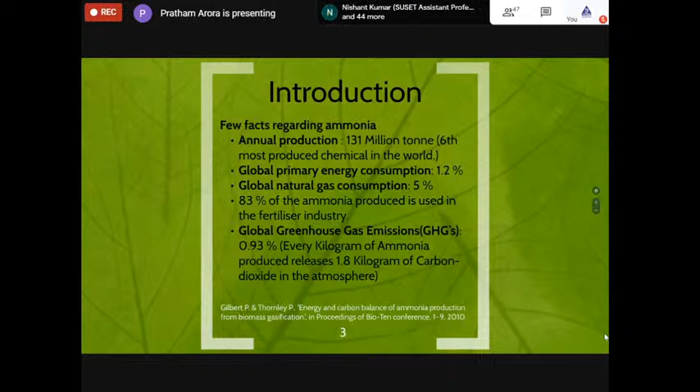So next, can biomass be a potential feedstock for this? Now, biomass is widely available and it is carbon neutral, because any emissions that you cause by the use of biomass or through the burning of biomass are recycled again through the growth of biomass in due course of time.

The same can be said for fossil fuels like coal or natural gas. They would be produced in due course of time, but their due course of time would be of the order of millions of years, whereas for biomass it could be as low as 20 to 30 years. That's why biomass is said to be carbon neutral. It has a very low shelf life in terms of CO2 emissions. The emissions caused now by burning or using biomass will be recycled in another 20 years, so the life cycle of the CO2 is very small, whereas for fossil fuels it would span millions of years.

But biomass, unlike other fossil fuels, has a low energy density. The reason being, biomass has a huge amount of oxygen. A typical biomass would have around 50% oxygen, whereas this quantity is only 5 to 6% in coal. So the efficiency is almost reduced by 50% as compared to other fuels like coal or petroleum, which hardly have any oxygen. This also decreases the density, and a decrease in density means a huge transportation cost.

Also, biomass is not available all the time. It's restricted by seasons. You have certain farm-based feedstocks which are available only after the harvest of crops. Wood can only be harvested at a particular time. Like, when the monsoon season is going on or just ended, you can't harvest any wood at this time because it would have a huge amount of moisture. So it has its own problems.

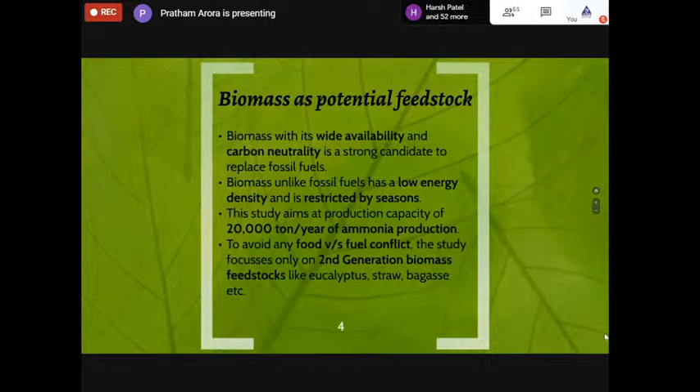So we are just aiming for second generation biomass feedstock, which includes trees like eucalyptus or rice straw, which has been burning in the field, or bagasse, which don't have any food value. So they are called second generation biomass feedstocks, and our study will focus on these types of feedstocks.

But there are some added advantages as well. If any of you is from North India, you might have experienced the smog in the months of October and November - I believe it's going to start again soon. This is majorly attributed to the burning of straw in the rice fields. The farmers are also helpless; they have just 15 days to extract the waste from the field and plant a new crop. They don't have enough money to collect the feedstocks spread on the field, so the best way they can do it is just burn it. This makes the task easy and helps their soil, but causes pollution throughout northern India.

The second part is something peculiar that we notice in countries with huge deserts, like Australia. Here you can see salt coming out of the earth - this is called dryland salinity, caused by high water tables. The salt comes out of the land and renders it useless for any purpose. It could be made useful by planting trees like eucalyptus, which consume a lot of water, and by using that water they can help solve this problem. So not only the problem of ammonia production, but we are also trying to solve associated problems like pollution in northern India as well as dryland salinity in Australia.

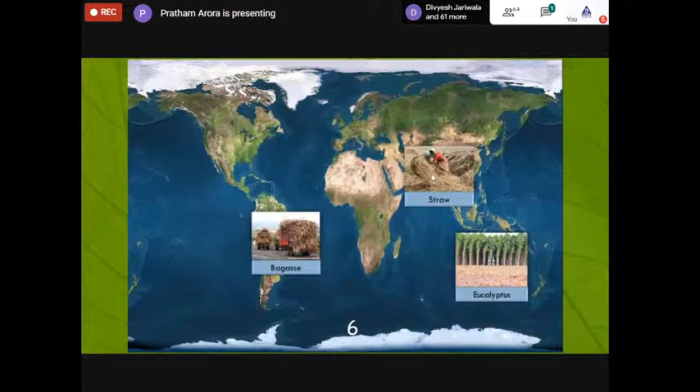So, reiterating again, now I have three different countries and three different biomass feedstocks: eucalyptus, straw, and bagasse. All three are different types—one is woody, the other is a farm waste, and the third is an industrial waste or secondary residue. And third, all three have different supply chains; there's no similarity whatsoever. So the aim was to get enough diversity—we are looking at different countries, different biomasses, and different supply chains, and we are trying to see if we can produce ammonia from different aspects using biomass. So let's go further.

Now, we chose a process called biomass gasification. By biomass gasification, I mean you gasify or heat biomass in an insufficient supply of air. When you do that, biomass gets converted to gas called syngas or producer gas, depending upon the oxidizing agent. If you are providing air, about 50% of the gas is almost nitrogen, and it's called producer gas. If you are giving steam or oxygen, the output gas would be concentrated in carbon monoxide and hydrogen, and it's called syngas.

Different types of gasifiers have been proposed at different levels of operation, and some of them are listed in this figure. If you're coming from a mechanical background, you might be aware of this, or if you've done research on biomass, these are different types of gasifiers available, and all of them are economical in different ranges of capacity. Beginning with downdraft to updraft—downdraft is economical at very low scales, maybe 1 to 10 tons per day of biomass, while entrained flow gasifiers are economical at very high scale, around 10,000 tons per day. The scale we were aiming at, based on the ammonia production scale, was around 100 tons per day, and the gasifier that was most economical was the fluidized bed gasifier.

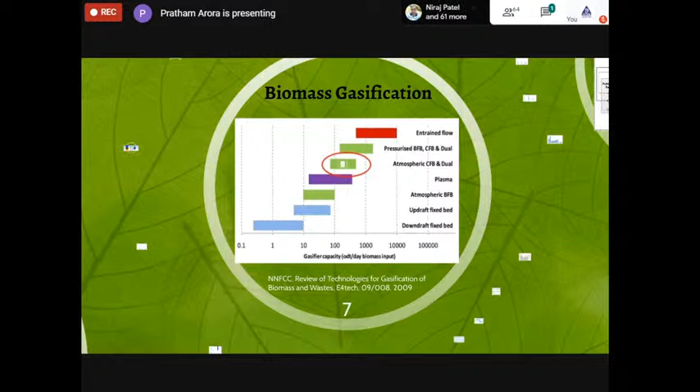By fluidized bed gasifiers, I mean biomass is sieved or cut into small parts, and it's entered into a bed which is subjected to a very high velocity of gases, such that the whole bed appears like a fluid. Let me show you in the next figure.

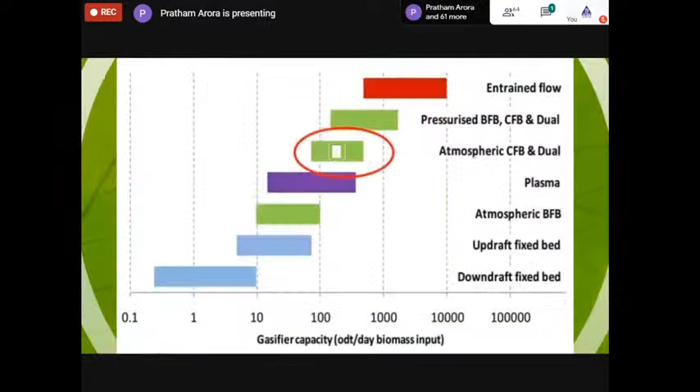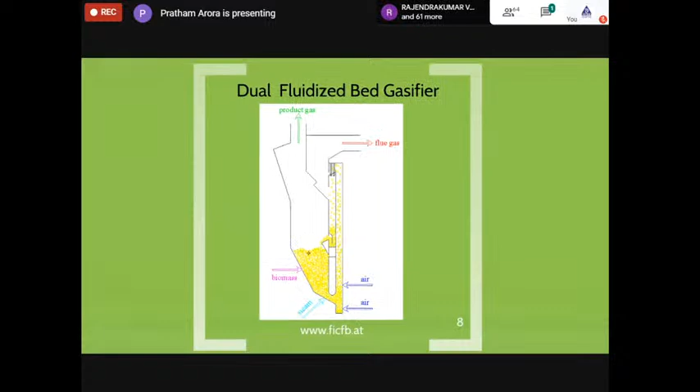So this is how the concept works. You have the biomass going in from the left side of the reactor, which is the biomass gasifier, and you have the steam, which is acting as an oxidizing agent. The steam is supplied at such a rate that the whole biomass acts as a fluid. That's why the name fluidized bed is suggested.

What happens after that? As soon as the biomass and the steam react, the biomass gets converted into three things. One is the product gas, or the syngas, which goes out of the reactor from the top. The second one is the char, something similar to charcoal, very rich in carbon, and that slides down and enters into a second reactor, which is called the riser. In the riser, we have a supply of air.

With this air, the carbon burns. Burning of the carbon will heat the bed material. The bed material used here is silica or something similar to sand. That sand gets heated and it goes up. There's a cyclone up here which removes the flue gases, which is just nitrogen as well as carbon dioxide, and the heated silica or bed material recycles back.

So the heat for running or burning of the biomass is coming from two sources. One is the steam, and the other is burning of the char that is produced, and that char in turn heats up the bed material, which is the sand. The hot sand gets recycled, provides heat for the biomass gasification, and we have the syngas going from the top. The whole process doesn't have any oxygen entering into the product gas, so that's why the gas we get is very rich in hydrogen as well as carbon monoxide. This is what the gasification process that we will be modeling looks like.

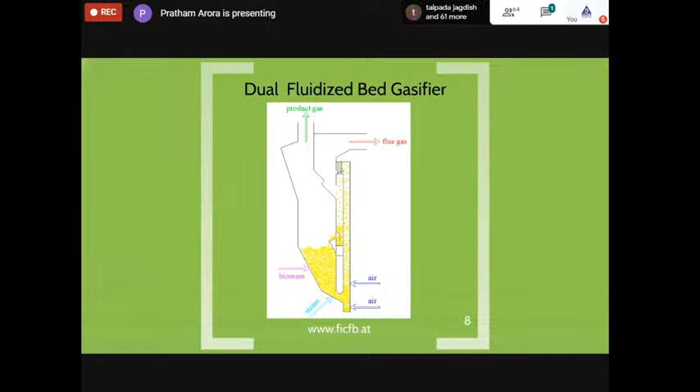It's called a dual fluidized bed gasifier because the fluidization is occurring at two beds, one for the biomass and the other for the char. So there are two fluidized beds combined together. It's very similar to the FCC cracker that you would see in a conventional petroleum refinery, if anyone has done any research on crude refining.

Okay, so let's start with the modeling of the gasifier. A multi-scale approach was used. The gasifier that we chose was an 8 megawatt gasifier that has been running successfully in Austria for the last 15 years or so. It is one of the success stories in gasification, which doesn't have many success stories till date. We adopted all the input data from that particular gasifier, which is available in open literature.

The first thing we did was recognize that gasification is a dynamic process. It has a lot of variability with respect to the supply of biomass and oxygen, and the simulation we were aiming for was a sort of steady state simulation. So we had to convert a dynamic system into a steady state system. How do we do that? We did something called the RTD approach, which is residence time distribution, or the tracer approach.

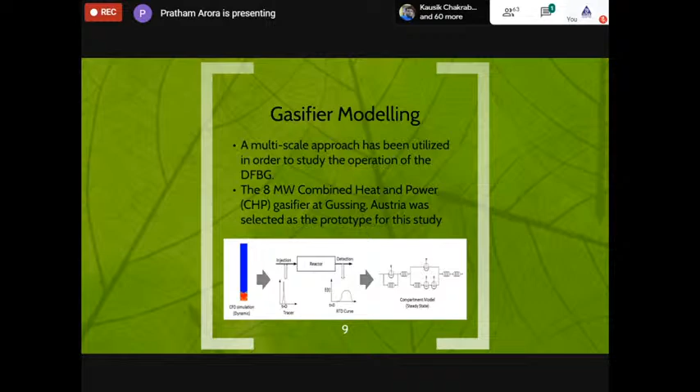We simulated the whole fluidized bed process in ANSYS Fluent software. Once the simulation achieved a quasi steady state, we introduced a tracer at the input and noted down its concentration at the output. The structure of the tracer's concentration profile at the output hinted at the possible network of ideal reactors that could be used to replicate this dynamic system. Let me take you to more details.

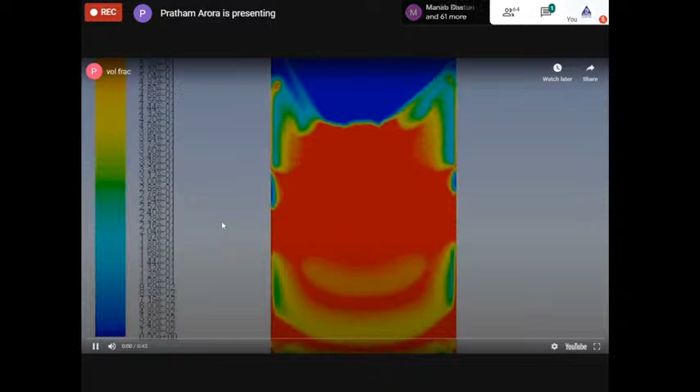So this is what the typical fluidized bed looks like in a simulation. Probably you can see now the bubbles are almost equidistant on the left and right side, but as time proceeds, the profile changes.

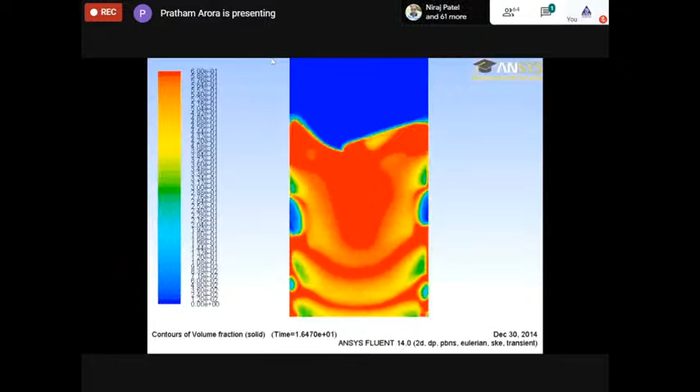So we can note down certain essential parameters and see when they stabilize, and at that point we can say it's a quasi-steady state. Once we have achieved that, we can introduce a tracer which doesn't have any reaction, which won't react with any of the components. It will just go with the velocity flows, something like this.

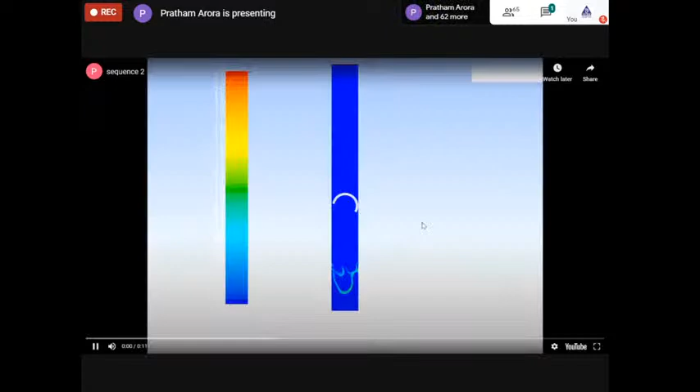You introduce a tracer and it goes along with the velocity profile of the current profiles, and you can note down the concentration at the end. You can see some of the tracer in the middle there.

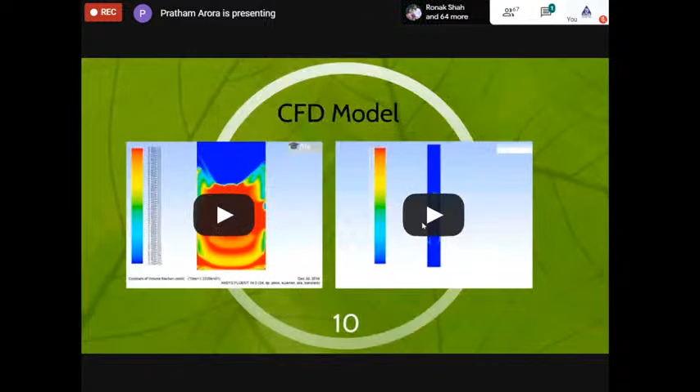So this is how we did this in ANSYS Fluent software, and we took different approaches. Let me briefly mention them. The first one is that we froze all the velocity profiles and let the tracer go through, and we got a very simple tracer profile at the output.

The third one was a data sampling approach, in which I averaged the velocity profiles over say 10 seconds and then did a tracer analysis, with similar results. Finally, I had to do a transient approach in which the velocity profile or velocity equations are changing in concurrence with the tracer equation. This gave us the tracer profile which we aimed to replicate.

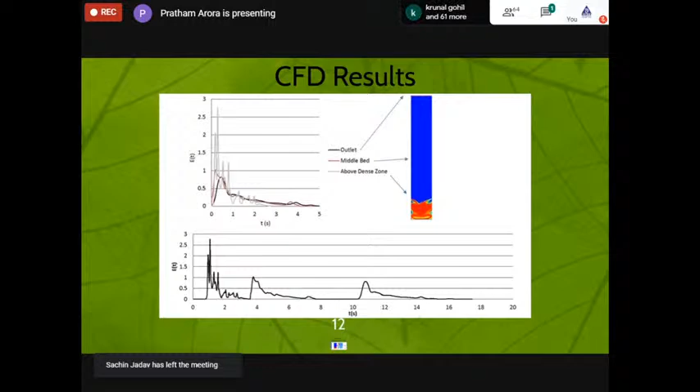This also gave us a deep insight into the velocity profiles. On the right-hand side, I'll show you the velocity profile, how the gases look at different heights. We could see that just above the bed there is a wake formation, so either the gases are going from the left side or the right side. So there are two different chains of reactors that would be needed to model this.

And the model that we came up with was something like this. This part is basically a dense zone or the fluidized bed, which includes — okay, let me give you an understanding of the different ideal reactors as well.

There are two kinds of ideal reactors. One is called a plug flow reactor (PFR), and the other is the continuous stirred tank reactor (CSTR). Any reactor we might have could have performance in between both of them. They are the two kinds of ideal reactors which replicate the ideal flows at the two ends of the conversion process.

So any process, or any reactor, can be modeled as a combination of these ideal reactors — it could be multiple PFRs or multiple CSTRs. Our aim was to model this dynamic process with the help of these ideal reactors, called PFRs or CSTRs. So we came up with this model, the first for the fluidized bed.

Now, the fluidized bed has the bed rotating inside, so it should have a recycle. So we came up with the reactor design: a CSTR with a recycle, followed by a PFR. Now remember the middle, where I showed you the two wake formations.

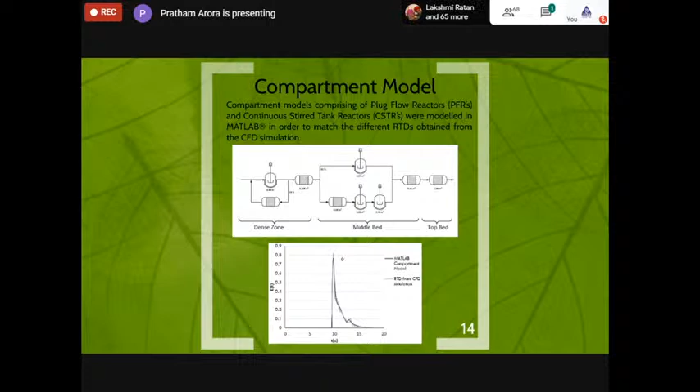We also did a study where we tried to match it with the standard equations using MATLAB, and we got a nice validation of our model as well.

So this is how the reactor looked like: the combined fluidized bed reactor, which I've shown here, has the dense zone as well as the syngas coming out, and the char going to the combustion reactor, the char combusting, and the hot sand coming back. It could be modeled something like this.

This was done in Aspen Plus software, which is a very dynamic software, mostly used for chemical engineering processes, but now gaining a lot of importance in process systems engineering, specifically for biomass related simulations. So this is how we could model the whole biomass gasification process.

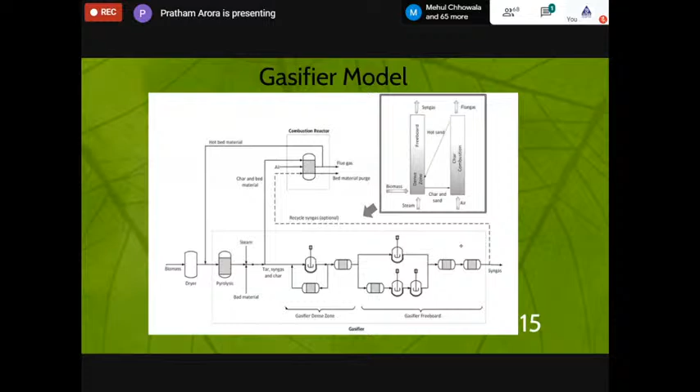It started with biomass coming in, then we have a small pyrolysis reactor which breaks down biomass into different components. Then in the whole gasification process, we have the char and sand leaving; it goes to the combustion chamber, gets heated, and the hot bed material is sent back. So all the processes that occur in an actual process were replicated in the simulation in a steady state. This was our first task, and that was fulfilled.

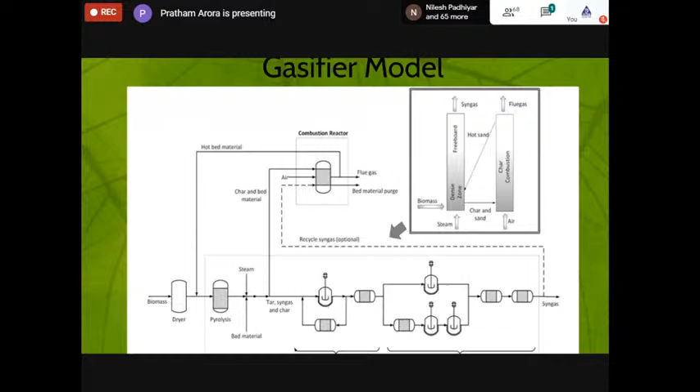And not only this, we did it for 3 feedstocks. Remember, we had 3 feedstocks in the initial one: eucalyptus or wood, straw, and bagasse. We had a common input of 2.3 tons per hour, with moisture content around 27%.

Based upon the characteristics of biomass, we had different composition of gas, though all 3 of them had almost 40% hydrogen and around 20% CO. We could validate this with experimental values, and we came up with nice validation.

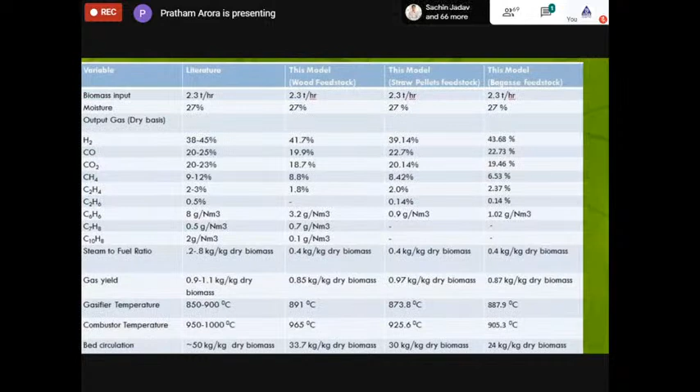So you can see different biomasses react differently. They produce gases of different composition, different types of tars, and different temperature profiles. You can see the temperature profiles varying, and they would also have different amounts of bed circulation rate needed, which also changes to maintain these temperature profiles.

Again, we did a sensitivity analysis, and even that was found in validation with the open literature. We could find the relationship between the gas composition, temperature, and the gas flow rate, and that was nicely validated.

So once the model was ready, we wanted to go for ammonia production. Now, ammonia production is a difficult process. Hydrogen comes from the reforming of synthesis gas. If any of you remember natural gas reforming from school or college, that is the process of producing hydrogen, and that hydrogen is then combined with nitrogen to produce ammonia. So we tried to do the same thing.

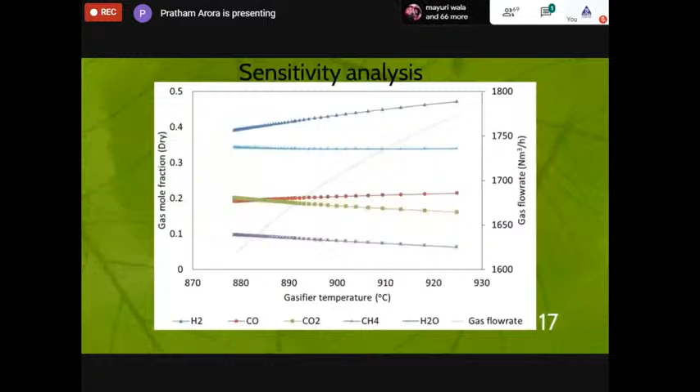Once you have reforming, which occurs at around 800 degrees Celsius, we need to cool the gases. Then we need to compress the gases at around 20 to 30 bars, because all subsequent processes occur at high pressure. Then we have a shift reactor, which is basically conversion of carbon monoxide into carbon dioxide.

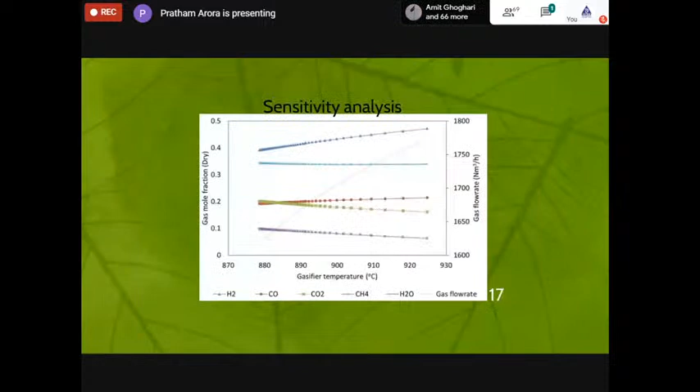The gas has almost 20% carbon monoxide. If you look up the water gas shift reaction, it's nothing but CO combining with water, giving CO2 plus hydrogen. So in a way, I'm converting carbon monoxide into hydrogen while consuming some water. That's where the steam is going in.

After the isothermal shift, we need a saturator or desaturator for removal of water. Then we need a PSA for removal of CO2, and also a methanation unit to remove any leftover carbon monoxide or carbon dioxide, because these poison the catalyst. Finally, we have another compression which compresses the gases to around 80 bars, and we have an ammonia synthesis loop running at this lower pressure.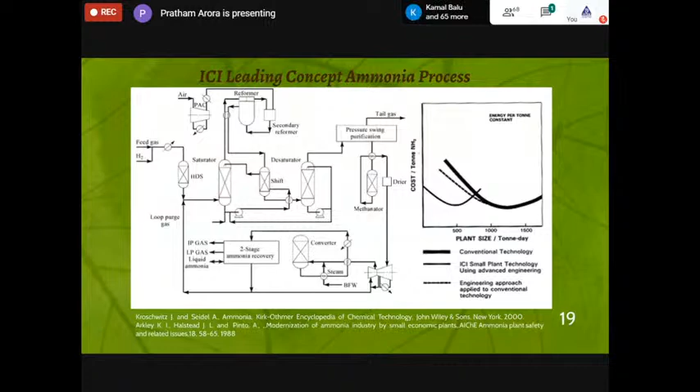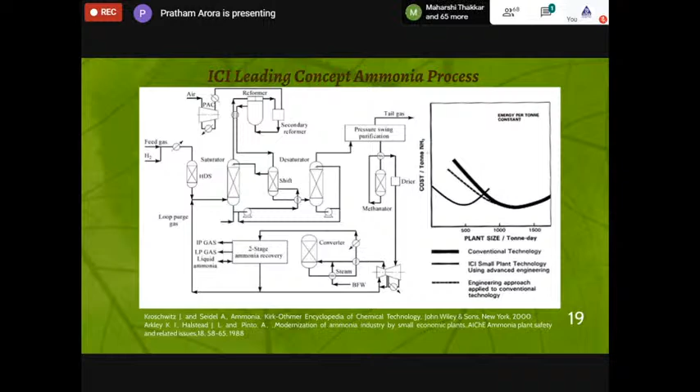The reason we did this is that the plant we adopted was a technology from the early 2000s for small-scale ammonia, but it couldn't compete with large-scale plants due to certain factors. Whereas normal plants achieve minimum cost at around 1500 or 1200 tons per day, these kinds of plants achieve minimum economics at around 450 tons per day. That's why we adopted these technologies—it was a novel combination of a new technology, the dual fluidized gasifier, with an old technology, the ammonia production process.

So now we have three different configurations of the ammonia production process as well, based upon how we are reforming the syngas.

The first one had an autothermal reformer, which means I provide in the air. The air has nitrogen and oxygen. The oxygen is used to combust some amount of syngas, which would provide the heat, and the nitrogen provides for the nitrogen requirement for ammonia. Remember, ammonia is two things, hydrogen and nitrogen, NH3.

The nitrogen is coming from here, and the hydrogen is coming from the gasification process as well as the shift reactor here. The second option is steam methane reforming, wherein I'm just providing in steam. I can do it with a small reactor because everything up to here doesn't have any nitrogen. The nitrogen I can provide just before the ammonia loop through an air separation unit. But I need to provide the heat for the reaction, which would be taken from burning the fuel outside the reactor.

The third one is a novel combination, called CO2 reforming or dry reforming. Why not use the flue gas from the combustion section of the gasifier? The gasifier had two fluidized beds, one producing syngas and the other burning char and heating up the bed material, and the gases released were just nitrogen and CO2. So why don't you use that gas?

That gas is coming at around 800, 900 degrees Celsius. You use that gas in this reactor. That will provide heat for this reaction, as well as provide the nitrogen that is needed later on. So this was a novel combination that we proposed.

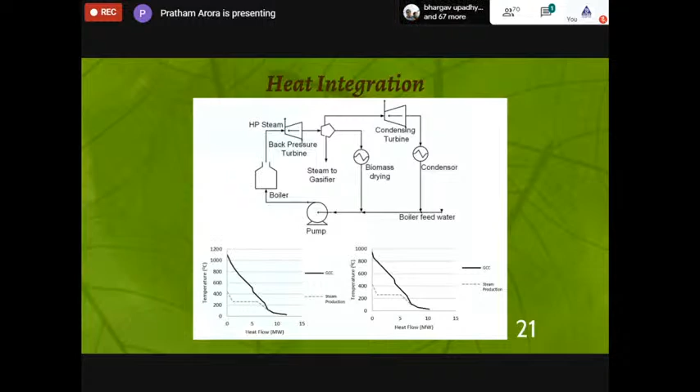Biomass feedstock is the cheapest in Brazil, since bagasse or sugar cane is grown a lot. Then second comes India, and Australia has the highest cost of production of biomass. Electricity is highest in Australia, second comes Brazil, and the lowest is in India.

So different factors would apply differently when we are talking about the same process. We have the same process of ammonia production, only the difference is different places and different biomasses. And you can see how different the economics could be. For India, I could produce ammonia for as low as around $700 per ton. It goes almost double, around 1,300 per ton, in Australia. A similar process, but a different biomass.

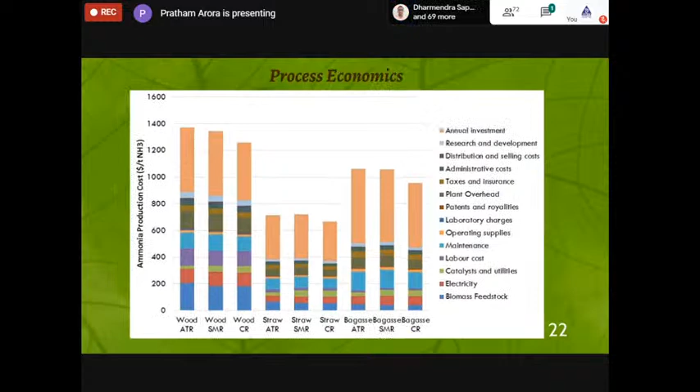It's highest for the SMR case. The reason being, we need an extra reactor, an air separation unit to supply nitrogen, whereas nitrogen could be supplied through the reformer in both the ATR and the CR. In ATR, it's the air which has nitrogen. In the CR, it's the flue gas which again has nitrogen. But for the SMR flow sheet, we need an extra source of nitrogen coming through the ASU, and that has its own cost penalty.

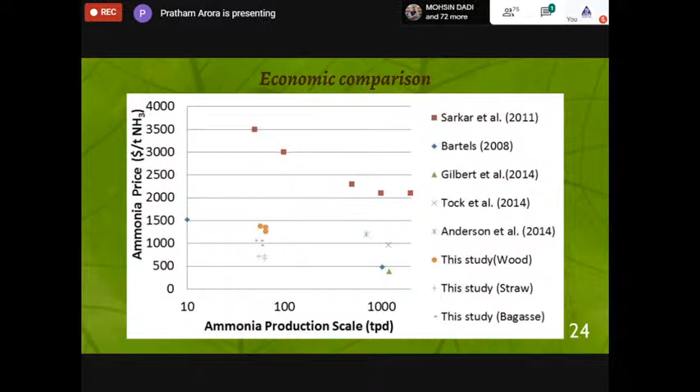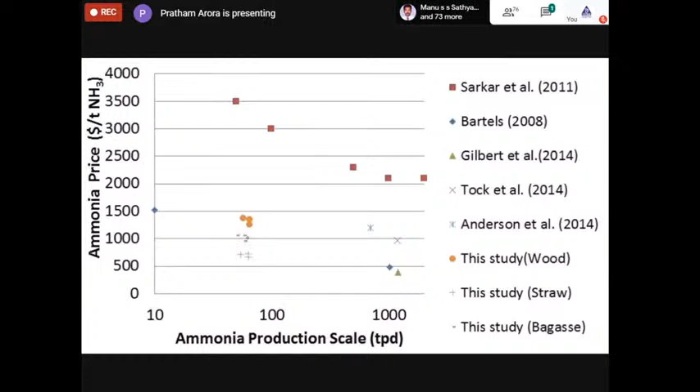So we did a comparison with different studies for ammonia production from biomass, and we found we could achieve the same cost economics at a small scale, which people were proposing at around 1,000 tons per day. That was an achievement. Normally, as you decrease the plant size, the economics would go higher, as can be seen in the scales. But we achieved similar economics for different cases. The lowest one is straw, then comes Brazil for bagasse, and the highest one is for eucalyptus. This was all because of the interventions that we proposed.

So finally, life cycle assessment. What do you mean by life cycle assessment? It means we quantify the emissions throughout the life cycle of the process at different stages. Now you grow biomass, you will need certain fertilizer, pesticides. We need to account for that.

You transport biomass, there are trucks going to and fro. They will go with biomass and return empty. We need to take into account the diesel that goes into the trucks. Then we have the drying process, which would use electricity and heat. We need to account for that.

We have the gasifier process, which would consume different oils, charcoal, as well as bed material. We account for that. We have the utilities, either using electricity from the grid or exporting it. We have the refrigeration unit with its refrigerants. We have different reactors with different catalysts. We have cleaning mechanisms, which consume different filters as well as chemicals. So we need to count everything to see if it makes sense to produce ammonia from biomass. Are we doing any betterment to society by adopting this strategy? This is something we need to prove.

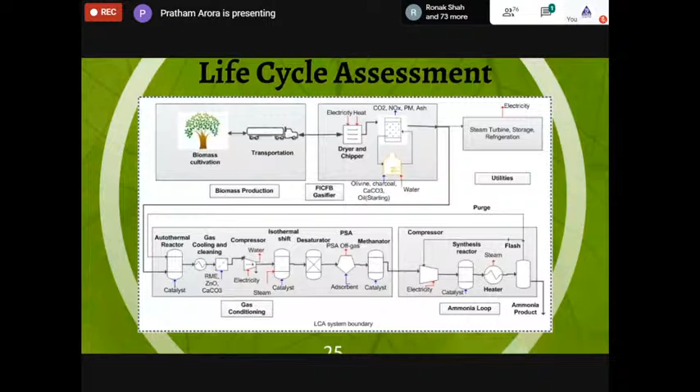So the process is like this. There are different categories of life cycle assessment, or different indicators. The most common one is the global warming potential or climate change, that is how much CO2 you are leaving into the air. But is that all? No, there are many others.

These are just a small subset of chemicals emitted from any process. They could lead to 18 different categories: ozone depletion, human toxicity - are the gases we're taking toxic - radiations, are there any particulates in the air, ecotoxicity, acidification - are water bodies getting acidified - agricultural land occupation - is agricultural land available - and eutrophication, the nitrogen content in the water, is that increasing or not. So we look at all the different categories, not just climate change.

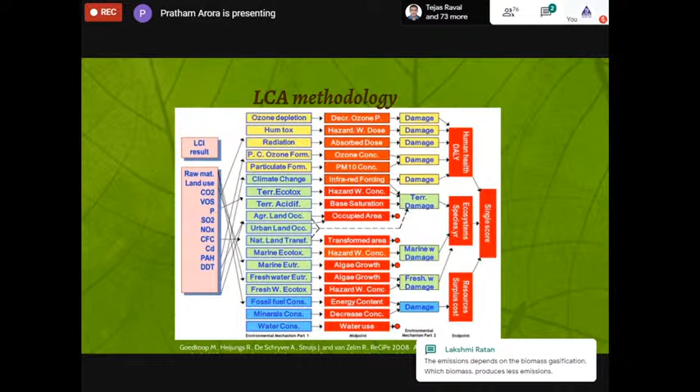These categories can also be clubbed together into a single score by using different normalization factors. So there are two ways of looking at the LCA result. One is at the midpoint indicators, where we can directly correlate the emissions to the indicators, like the different gases which lead to global warming - we have different factors for that, we multiply them, add them, and get the climate change potential or global warming potential. Likewise, we can calculate ozone depletion potential, ecotoxicity, or eutrophication. So the path is quite well laid and you can easily correlate.

But it doesn't make much sense to common people like you and me. So for them, they need a single score, whether the process is good or bad, as simple as that. So we have all these things combined into a single indicator, called a single score. Again, there are three major indicators before that which can be clubbed: human health in general, measured in a unit called DALY, disability adjusted life years - what is the normal years of a human being that is decreased because of any of these reasons.

The second one is the ecosystem species, what is the lifespan of different species if it's decreasing. The third one is the resources, the natural resources that we have, in the form of dollars. So we can combine all of this to give a single score. These kinds of things would vary with different locations and time spans, but nonetheless it's an easy way. The values can vary a lot, whereas in the midpoints, the values are much more concrete, but difficult to understand.

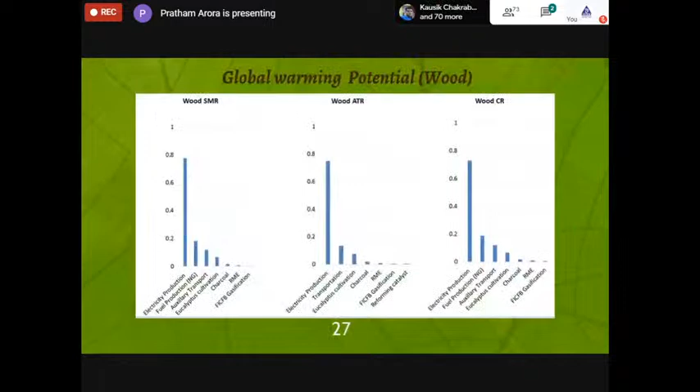If I go for Brazil, it's very less, so it's a huge jump. Electricity you can see here is less than 0.2, whereas it was more than 1 in India. The reason being, in Brazil a lot of electricity is coming from hydro processes as well as burning of bagasse. They burn bagasse, use it to raise steam, and that steam is used to run turbines and produce electricity, as simple as that. So this was the global warming potential for three different feedstocks in three different supply chains.

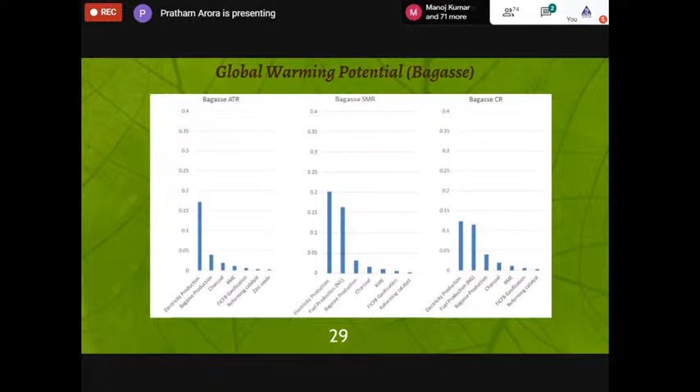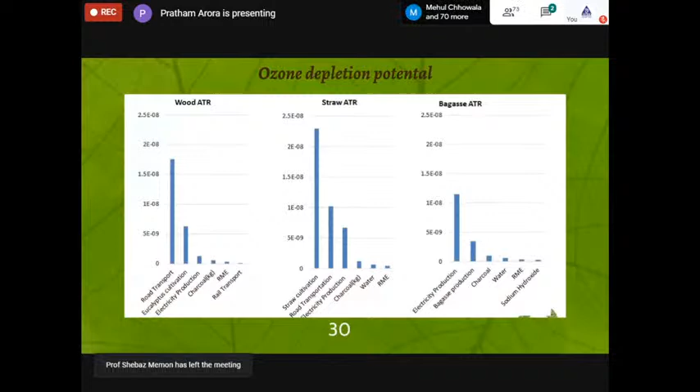The next one is the ozone depletion potential. Now I would ask for attention here. I am looking at the different feedstocks at different places but the same configuration, the ATR configuration, but it's wood, straw, and bagasse. You can see that different factors lead to ozone depletion in different places.

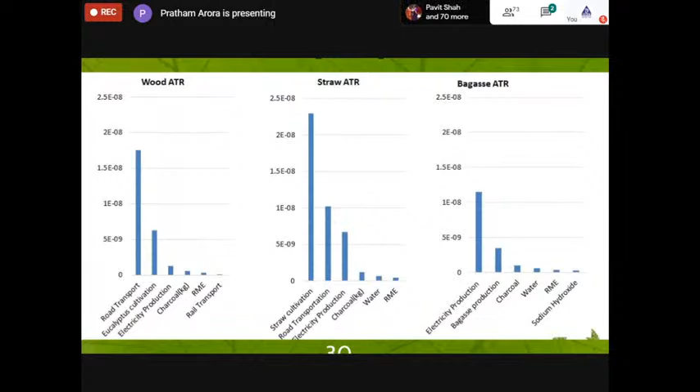For wood in Australia, it's the road transport that is leading to ozone depletion. For India, it's the straw cultivation—a lot of pesticides go into straw cultivation and they lead to ozone depletion. In case of bagasse, it's electricity production. So different factors can lead to different types of emissions in different places and different biomasses. This is the point I want to impress using this study.

So finally, multi-objective optimization. So what do I mean by multi-objective optimization? Now you all have heard about the word optimization. We all want to optimize the things that we do.

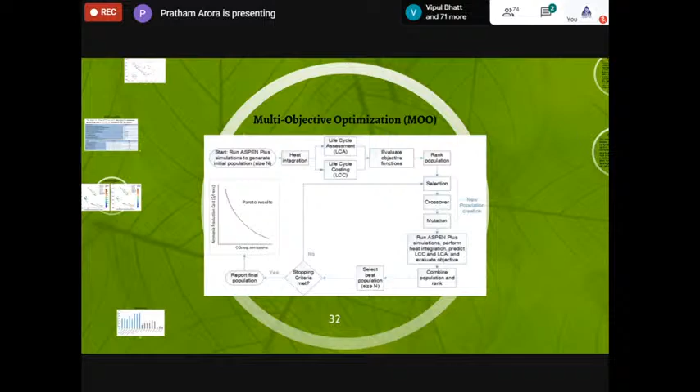But in multi-objective optimization, what we want to do is come up with a Pareto front, which gives us a graph, and all the values on this front are optimum. You might be wondering, how can all of them be optimum? Yes, they are, with respect to two parameters: ammonia production cost and CO2 emissions. If I take a value here and a value here, this one would have higher CO2 emission and lesser ammonia production cost. A value here would have lesser emission but more cost. So it's a trade-off between production cost and CO2 emissions, but all these values are optimum.

So it's up to the user at which point he wants to work. If he wants ammonia at a higher price and lower CO2, he can work somewhere here. If he wants a lower price and higher emissions, he can work here.

And how did we do that? We use certain genetic algorithms, and the name was NSGA2, which was a state-of-the-art algorithm. So the algorithm was something like that.

We run the simulation in Aspen Plus for a population size of 100. We do a heat integration so that all the heat sinks and supplies are matched. We carry out a life cycle assessment and life cycle costing. We evaluate the objective function, which is minimizing both the production cost and the CO2 emissions.

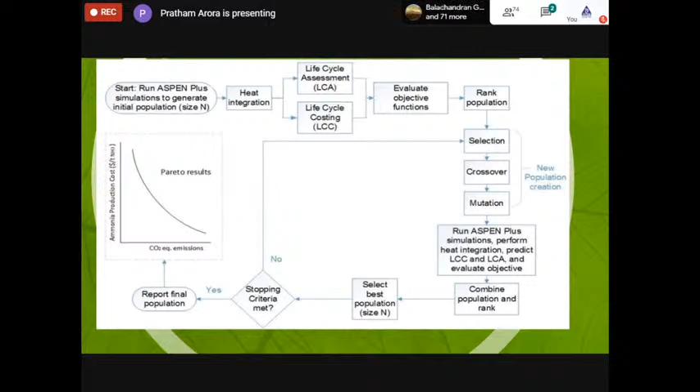We rank a population, do selection, crossover, and mutation, very similar to Darwin's theory of natural selection. The best solutions go further, and the not-so-good are left behind. The generation goes on till we get the best results. So this is how optimization happens in concise.

And what are the variables that we change? There are certain variables we need to change so that the optimum could be reached. These pertain to both the gasification and the ammonia production process. It could be the bed material flow rate, the steam given to the biomass, the gas conditioning pressure, the air that goes to the ATR, or the temperatures.

Also, we need to maintain the temperature in a certain range. Like, ammonia production should not be less than 1800 kg per hour. The reformer temperature should not go less than 800 or more than 1100. There has to be a temperature difference between the gasifier and the combustion temperature for a good heat integration between the gasification and combustion sectors.

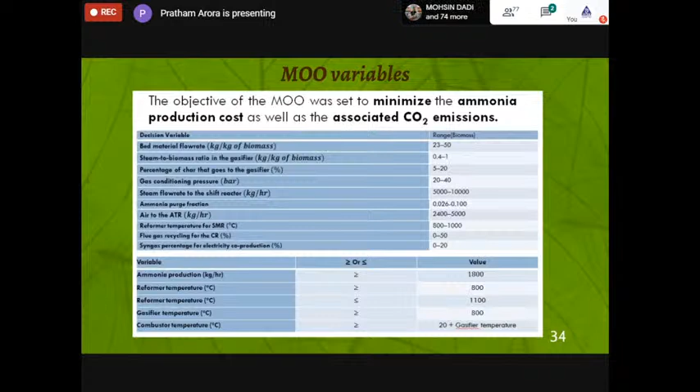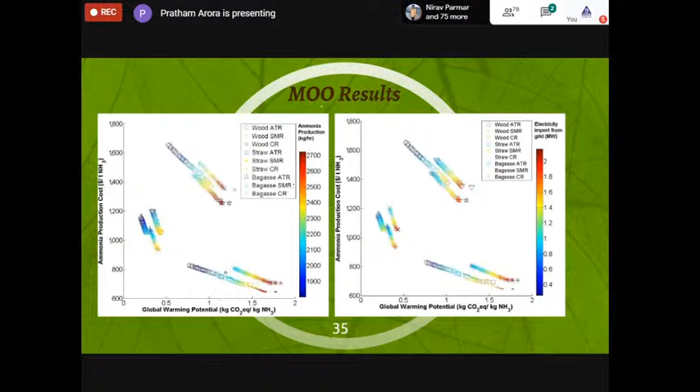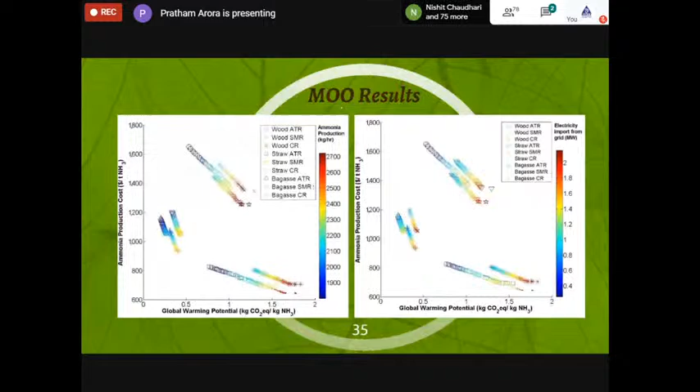Australia falls somewhere in between, but has a huge cost. The price varies from 1400 to 1600, almost double the conventional ammonia. Brazil is somewhere in between, but has a huge amount of emission savings.

This gives us the liberty to choose from different configurations. One important factor we're choosing here is that we could use some amount of syngas for producing electricity. That means using the hydrogen I have for heating the steam, or producing steam, and that steam can be used for producing electricity. So I'm using some hydrogen which could be used for ammonia production, for producing electricity instead.

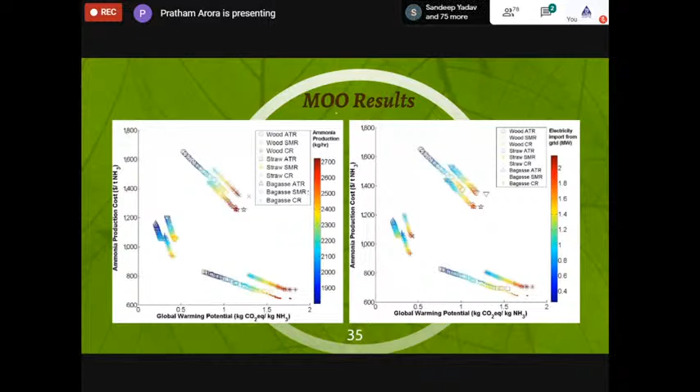That electricity is then used for the ammonia production process, so I'm not importing much. When I'm using a lot of hydrogen for producing electricity, the ammonia production is lesser, but since I'm importing less electricity from the grid, I have lower emissions. The electricity import from grid is lowest here and highest at this point. So it's a trade-off between using hydrogen for ammonia production or for electricity. If I use it for electricity, I can save a lot of grid electricity, which is non-renewable and adds to emissions.

This is how different factors lead to emissions associated with a green process like biomass when we look at a circular economy approach. This is where circular economy comes into picture, and it could have very different results for different geographies.

In India, the graph looks like this. For Brazil, it's very different. And Australia is again very different. The slopes could be very different, and the nature of the curves, like the bending of the curves, would also be very different.

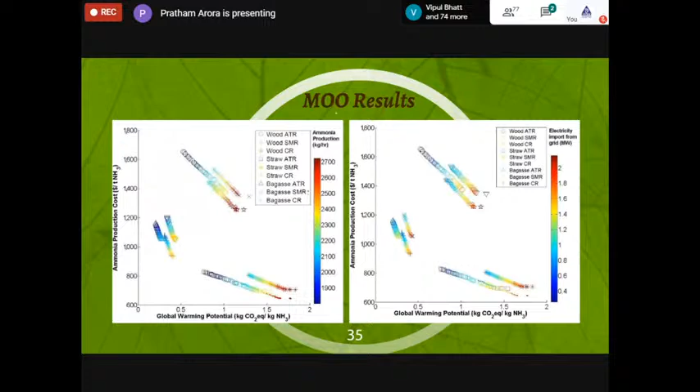So finally, we came back to develop a global Pareto, meaning if I want a certain type of emission for my ammonia production at a certain cost I'm aiming for, I can produce a global Pareto and ask: at which place in the world should I locate my plant?

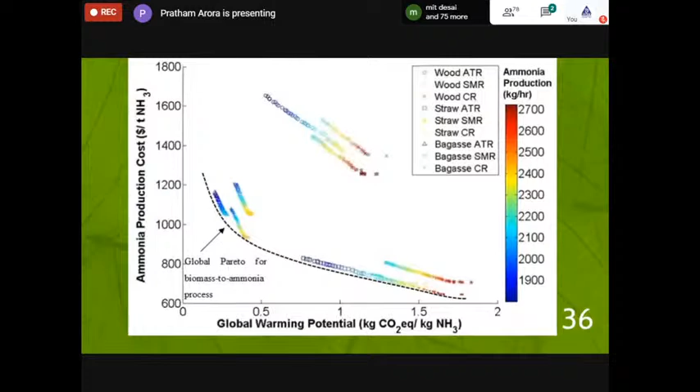If I'm looking for very low emissions, probably Brazil is the best case. If I'm looking for very low cost, India is a good place. If not, maybe somewhere in between, Australia might fit as well. So this is how we need to look at the bigger picture of circular economies to come up with the sustainability of any process related to biomass.

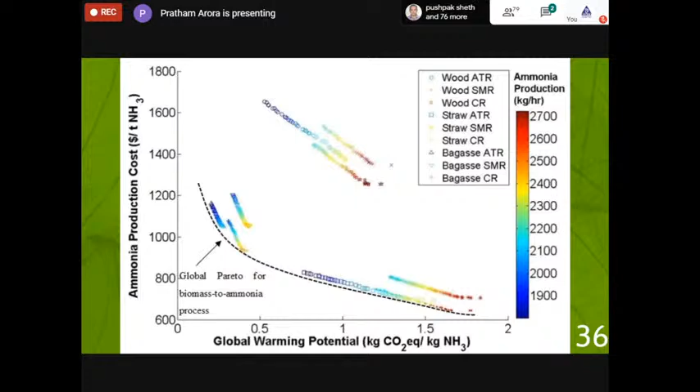No matter what the variability is, we are reducing the emissions. It could be low at some point or high at some point. It is highest in the case of India and lowest in the case of Brazil, as I have reiterated in the past.

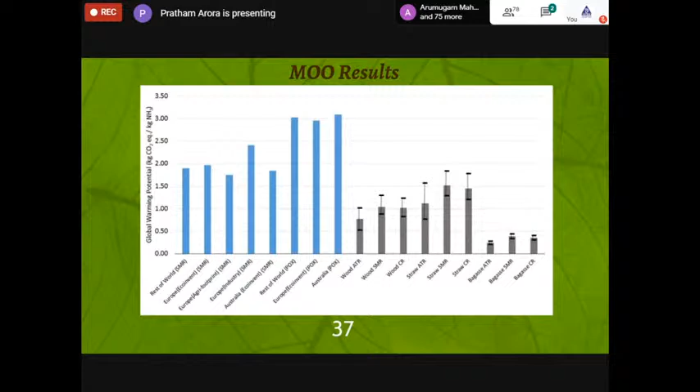So finally, the conclusion: we showed you a systematic framework for checking the sustainability of any product from biomass, which could be fuels or chemicals.

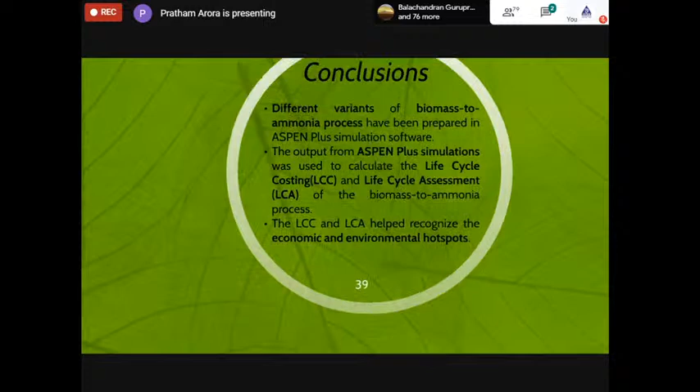We used different variations of the process, doing a life cycle costing and a life cycle assessment. Different platforms were used, like ANSYS Fluent, Aspen Plus, and multi-objective optimization genetic algorithms, across three different biomasses in three different places. Every biomass, every place, every configuration has its own advantages.

So you just can't say that if a process works in the US or in Europe, it would work for sure in India, or the other way around. If this process works nicely in India, or even among different states of India - if it works in Andhra Pradesh, it doesn't mean it will work in J&K. You can't be sure. You have to look at the different processes; they have their own nitty-gritties, and you need to understand them to get the best out of it.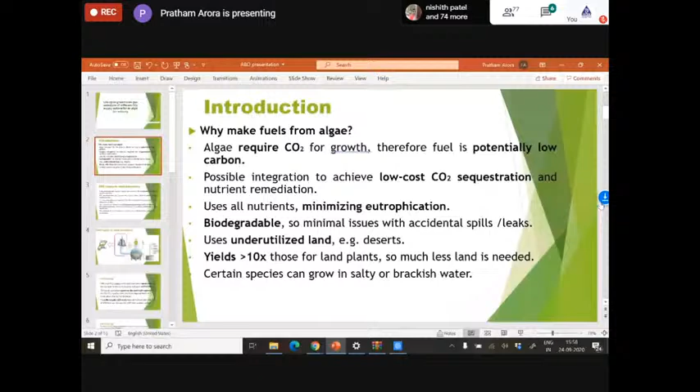Okay, let me do it full screen. So why make fuels from algae? First, simple question: they require CO2 for their growth, and that means they are natural CO2 sequestrators. They use all the nutrients available in the water, so they don't cause much eutrophication.

They are biodegradable. If you accidentally spill it somewhere, it might have a not-so-good smell or fragrance, but it won't lead to any environmental issues like oil spills. It can be used in underutilized lands, like someplace in Rajasthan or the midlands of Australia, which don't have any purpose, because these creatures only need CO2 and sunlight, readily available in places like deserts. And the yield is almost 10 times, their photosynthetic efficiency is more than 10 times that of normal terrestrial plants.

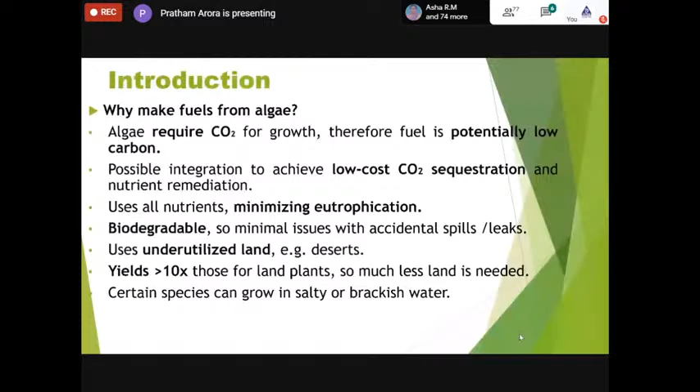Now, the CO2 supply to the algal biorefinery is a major source, and the CO2 requirements are responsible for more than 30% of the material cost. It is also important to quantify the CO2 emissions associated with the production and transportation of the CO2. The CO2 you are using won't come without any burden, you need to capture it and transport it, and that would consume energy. So this study tries to quantify that energy: does it make sense to transport and capture CO2 to be captured by the algae?

So we are running different scenarios just for CO2 potential, and the aim is to see what emissions are associated with 1 gram of CO2 delivered to an algal biorefinery. The CO2 is seen as a final product, I don't take it as an emission. I am delivering 1 gram of CO2, and let me see how much emissions I'm causing by delivery of that CO2—so it's the emission associated with the delivery of an emission. In that way, it's an interesting study.

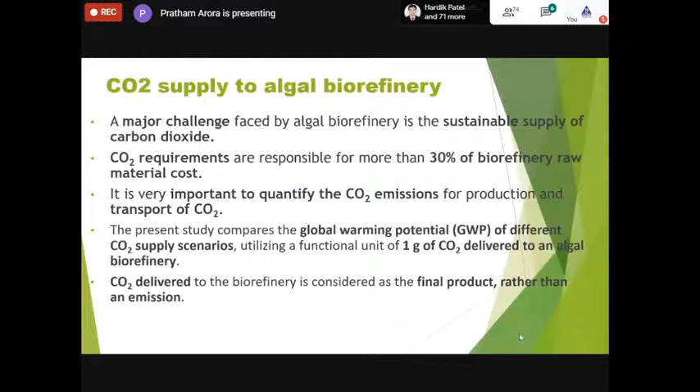Just to give you a better understanding of the process, this is our normal photobioreactor, which will be aiming for growth of algae.

It's like a long mechanical reactor in which you grow the algae. The only thing you need is the algae substrate, the light coming from sunlight, and the CO2 on which the algae would feed. Finally, from the harvest of this algae, you can produce different oils in the range of kerosene, diesel, or even gasoline, and also aim for production of certain chemicals like nutraceuticals, fertilizers, and others.

What we are trying to quantify is that if this CO2 is coming from power plants, what is the CO2associated with this?

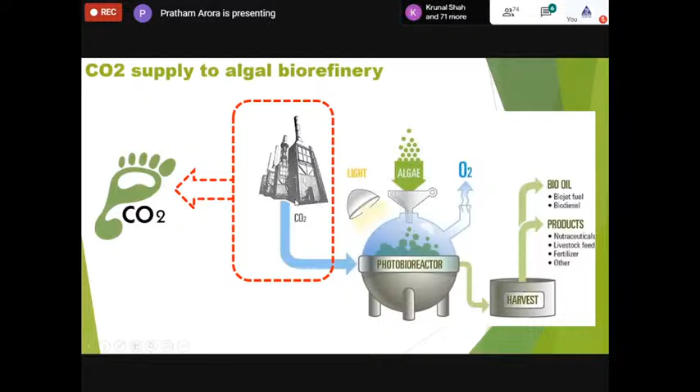So the methodology is we model all these processes in Aspen Plus, the same software used in the earlier study. The point here is that now it's a steady state problem, but it has a diurnal cycle. The algae will be growing or needing CO2 only during the day, because sunlight is only available during the day, so the process of photosynthesis can only occur then. So we only need to supply CO2 during the 12 hours of the day.

So we need to take care of this. For half of the day we are supplying CO2 and for the other half we are not. What do we do with the rest of the CO2? If it's a specially built CO2 plant, we have to vent it to the atmosphere or store it somehow. And it's a cradle to gate LCA study.

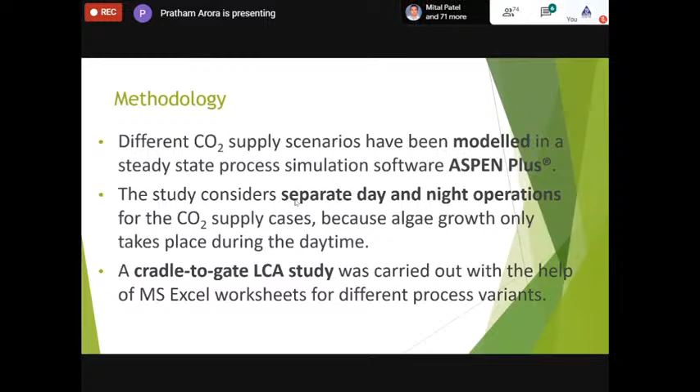So we took 4 different scenarios. The CO2 could come either from the coal-based plant, the natural gas-based plant, a specifically built NGCC plant just before the biorefinery, or a biomass combustion plant. We are growing biomass, combusting it so that it could provide fuel for the growth of more biomass. So it's an interesting scenario in that way.

The aim of this scenario is we are having a 2,000 hectare facility, which is quite a decent size. We are assuming that for the existing power plants, coal and natural gas based, the biorefinery would be somewhere between 2 miles, or around 3 kilometers, of this power plant. The standalone NGCC unit and the biomass combustion units are assumed to be constructed specifically for supplying CO2, since these kinds of plants won't otherwise be available.

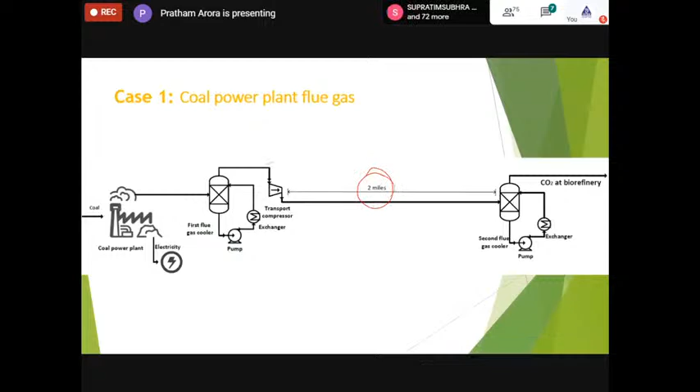So this is what the scenarios would look like. This is the first one, where we have a conventional coal-based power plant producing electricity and supplying it to the grid. The coal goes in, the CO2 rich gas comes out. We need a bit of scrubbing here and compressing it. We have a compressor for supplying it for 2 miles, and then we have another scrubbing just before the biorefinery.

The second one is the natural gas-based power plant. But in this case, we need to do a carbon capture, because of the amount of CO2. The normal percentage of CO2 in the gas from a coal-based power plant is around 13%, whereas it's almost 4% in a natural gas-based power plant. So if you're transferring it over a long distance, you're also supplying a lot of nitrogen, which isn't of any use. It makes sense to use a CO2 capture system here, with an absorber and stripper, to get a concentrated supply of CO2 and then transport it for 2 miles. It doesn't make sense to supply a gas with just 4% CO2 over 2 miles, since it would have a huge economic cost.

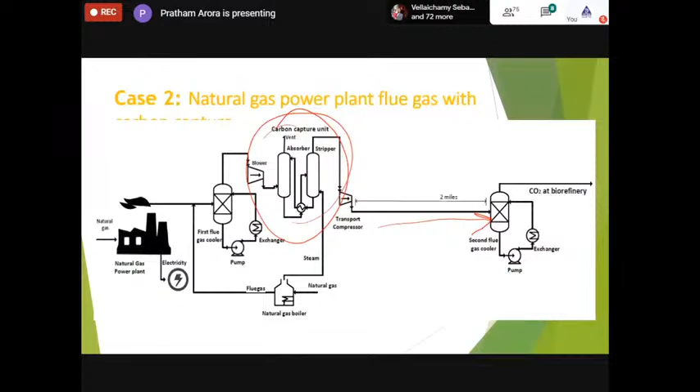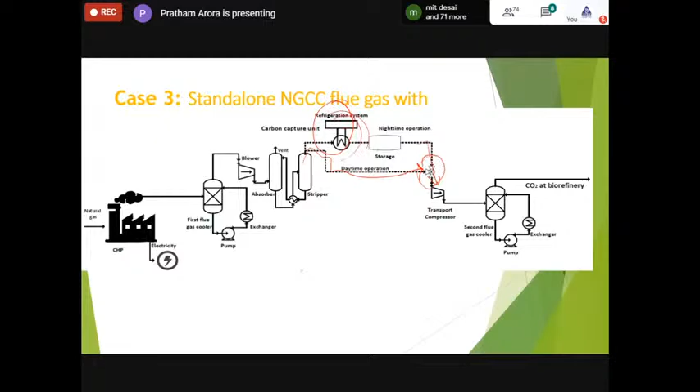The third scenario is you build a standalone NGCC unit. But in this case, you also want to utilize the CO2 that occurs during the night. So for that, you have a refrigeration system. In the daytime, you just take the CO2 and supply it to the algal biorefinery. In the nighttime, you refrigerate the whole thing, store it, and then supply it during the daytime. So the CO2 supply goes directly from the plant in the daytime, while at night I'm refrigerating the CO2 to liquefy it and storing it.

The fourth one is biomass. You can supply that gas directly to the biorefinery. It has almost 15% emissions.

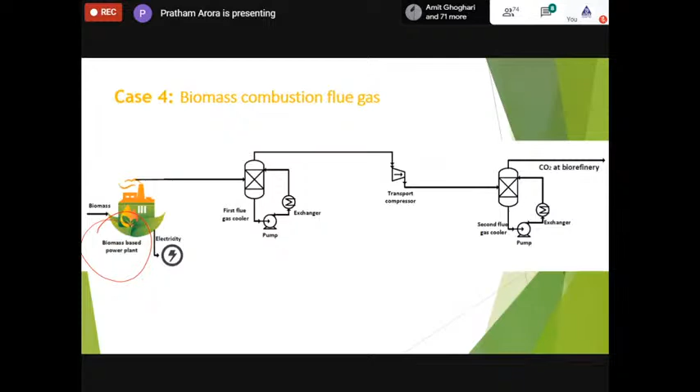So you have a biomass combustion flue gas, which you can supply directly from the burning of a biomass-based power plant. The difference here is that while all the earlier plants were running on fossil fuels, this one runs on biomass, which is a green source. Remember the CO2 cycle? The CO2 I release here would be recycled in around 20 years, whereas the CO2 from fossil plants would take millions of years.

So this is what the results look like. It's most efficient for the least GHG footprint to use the CO2 from a biomass process, which is intuitive since we are making use of that gas twice. These kinds of systems are called BECCS, biomass energy along with carbon capture, and they're getting a lot of focus nowadays because you're using the same CO2 twice, making a much more efficient use than anything. This CO2 can again then be recycled.

This is the beauty of the process. Then comes the coal-based power plant because you don't have any capture. Then comes the natural gas-based process because you need to involve a capture, and that capture has its own losses, which get released to the atmosphere. Finally is the standalone process. In the standalone process, if I'm going to deliver 1 gram of CO2, I'm spending around 5 grams of CO2, which is not a clever decision. Even spending 50% of the CO2 in the course of providing 1 gram of CO2 is not a very intelligent choice. So this is what this study was all about.

Again, the circular economy comes into the picture. You're using the end product of one process as a starting material of the other. Here I give the bifurcation of where the emissions are coming from, I won't go into the details of this. And just to give you a bigger picture of how the process looks, we have the coal-based power plant, a scrubber supplying over 2 miles, and then these PBRs which are running.

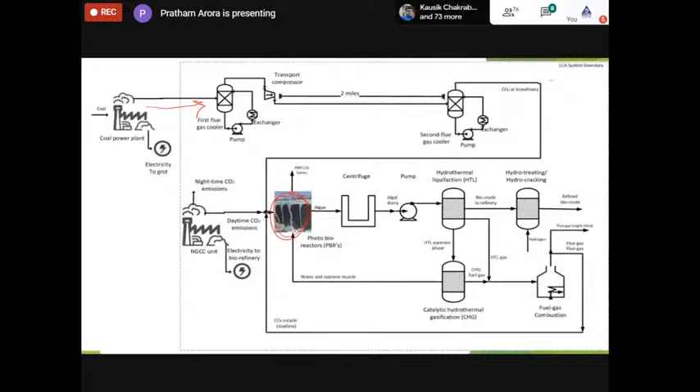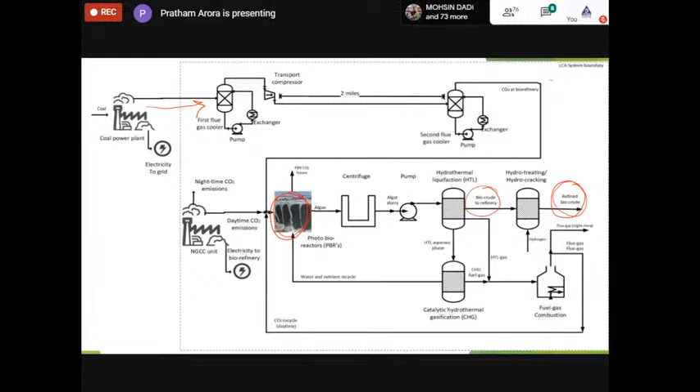And this is the process called hydrothermal liquefaction, which subjects the algae to around 200 bars and around 350 degrees Celsius. It will produce a biocrude, which could be refined to produce a fuel you can use in your vehicles. It's a complex flow sheet which I won't go into much detail on, but this is what the process looks like.

If I look at the LCA of the whole process, this is the point we are aiming for. There could be huge variability in the CO2 supply. A normal process with a gasoline or diesel base would be somewhere here, so we are reducing emissions almost 50%. This reduction is basically because of sequestrating the carbon, and it could change vastly if we are looking at different CO2 sources. So this is the point this study wanted to highlight, that different CO2 sources can impact the final emissions related to the fuel in a drastic way.

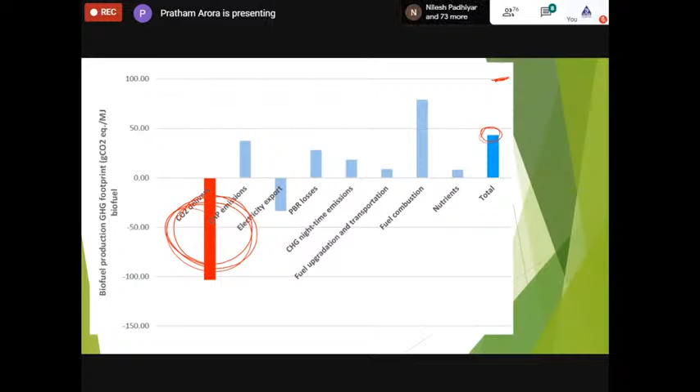That's another reason why we need to look at a circular economy, where all the products of a process are used somewhere else instead of causing trouble. So yeah, the CO2 supply from biomass has the lowest footprint process, so this is where the future lies. The standalone NGCC is something we shouldn't go for at all, and the fossil-based power plant is something we can have a look at, specifically in a country like India.

Let me know if you have any other questions. I would be happy to answer them.

Sir, one question. Did the quality of the CO2 supply depend upon the species of algae or its quantity?

Yes, it does. Different species have their own productivities, and based upon the productivity, they will consume different concentrations and different amounts of CO2.

Any question from participants?

Thank you, sir, for your nice presentation on biofuel related with algae, and your economical approach related to when we have used dual fluidized bed gasifier technology, we can also use it.